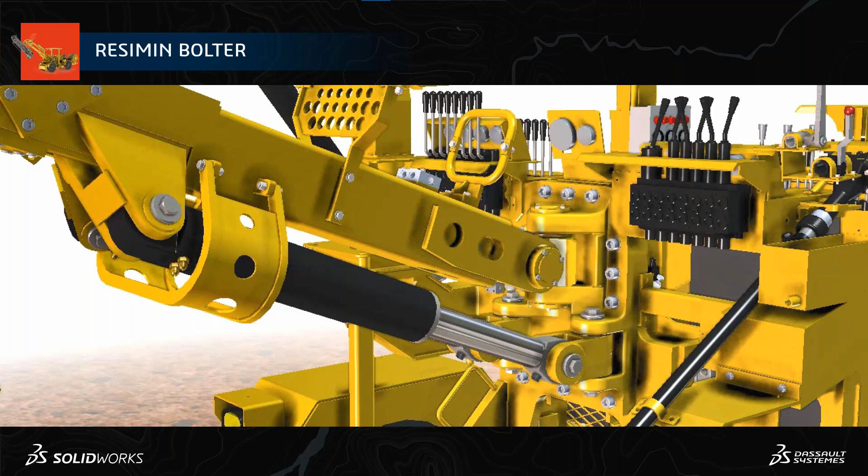In today's webinar, we'll be considering the Resemin Bolter assembly as a case study, a company that manufactures large heavy duty vehicles for mining and other operational activities. Here we'll be trying to design a knuckle component that exactly fits this particular assembly. So now let's start with the solution case studies.

In today's solution case study, we'll be taking different stages of the project launch. First we'll start with the project kickoff, next the mechanical design, next how we'll be validating our designs using the simulation options, next how we can bring this model into marketing and other activities, and finally closing the loop on the final presentation. So let's kick off with the project.

Having an organized approach for managing your project is a key requirement for most companies, maybe managing the existing assets when working on parallel projects, or when we are trying to collaborate across different departments based on the dependencies of the tasks. These are some of the major challenges that are killing more time and exceeding the deadlines of projects. So now let us see how we can manage these things using the 3D Experience platform.

So here we have something called a project planner, which helps you in planning the milestones of your project, where you can have a Gantt chart kind of appearance. That gives you a complete summary of the project.

So as well as you can create a number of tasks, manage your schedules, set up your deadlines, as well as plan your tasks accordingly and share it across the team members, so that you can have a complete overview of the completion of the project, where you're standing with respect to the project and what steps you have to take further to make sure the deadlines are being met at earlier stages. So all these things can be pretty much easily managed with the help of the project planner app.

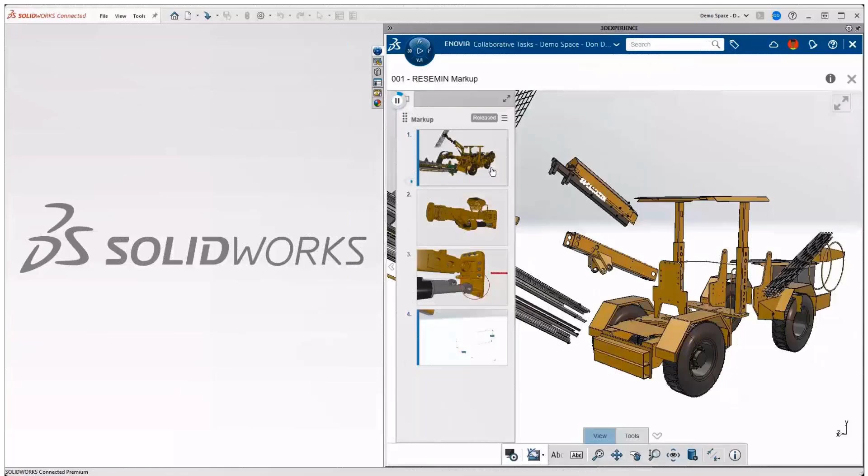So here I have some of the attachments being added from the management level, which are available in the form of slides, and I can completely go through the slides over here and across the visual representation of the model, without even opening the model. So that's how lightweight the 3D experience platform is, and that's how it's gonna hold our hands while managing bigger projects and bigger models. So here, based on the observations added in the slide, I would like to start working on my component. I can also start commenting over here on the task to communicate with the management, indicating that I'm going to start working on the task.

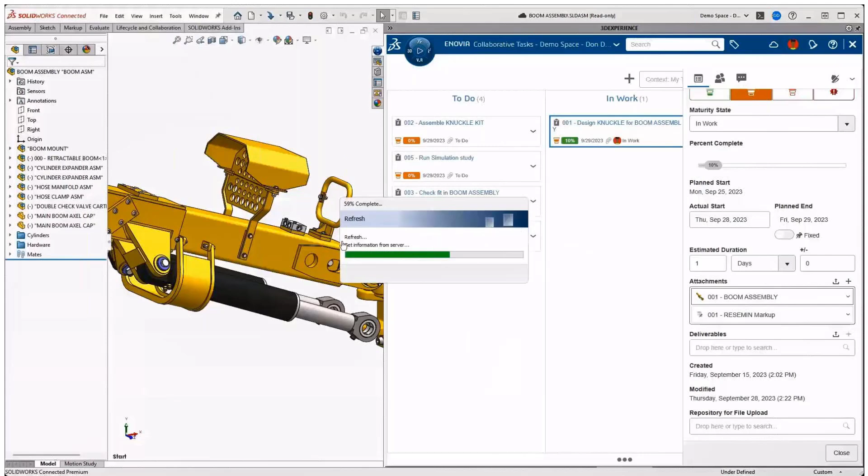And with the help of the attachments added over here, I can directly drag and drop the file that I need to be working on. So the advantage of the task management app is that irrespective of the file size, it can be MBs or GBs, you can readily select the file and add it as an attachment, and the same can be taken by the designer to start working on the further designs.

Whereas if we take up the traditional email process as an example, we'll have multiple restrictions wherein we will not be able to add large size files. So this is an exact replacement that we can consider for an email kind of approach. So now that we have taken up this particular model, let's start working on our further designs.

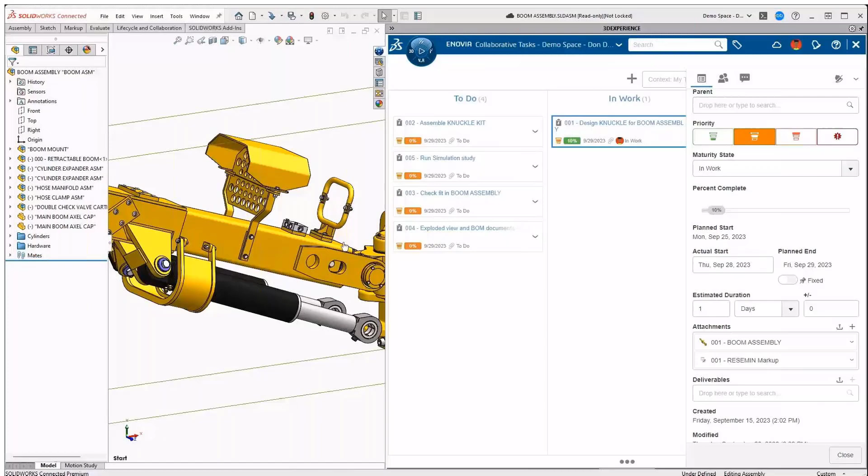So next, I just want to create a knuckle component over here. So I'll be taking up my part template for the designing, and then let's start doing our designs. So initially I'll be creating a simple circular sketch over here, and I'll be defining the dimensions as per my need. So next I'll be converting the sketches from 2D to 3D with a simple dynamic push and pull approach.

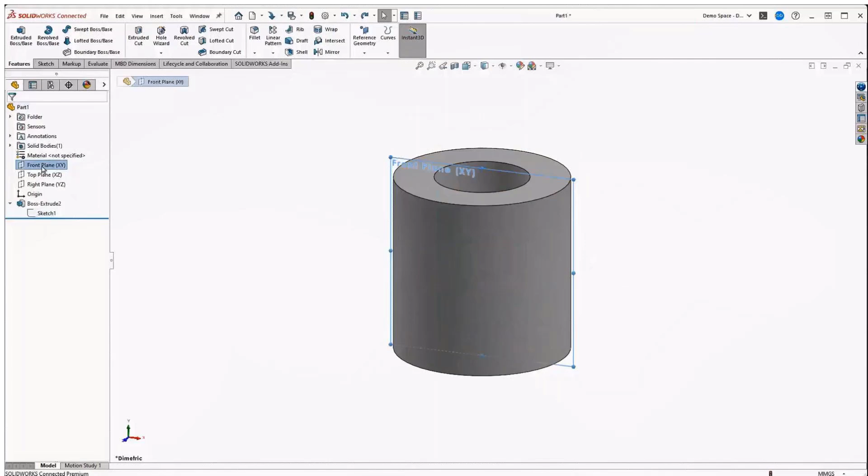And also we can make use of the traditional extrude command, as well as the dynamic push pull approach to create these kind of profiles. So the same profile can also be copy pasted from one plane to another plane, thereby indicating the faster approach. And with the help of these dotted lines, which definitely help me in adding constraints at the drawing level itself rather than adding them separately.

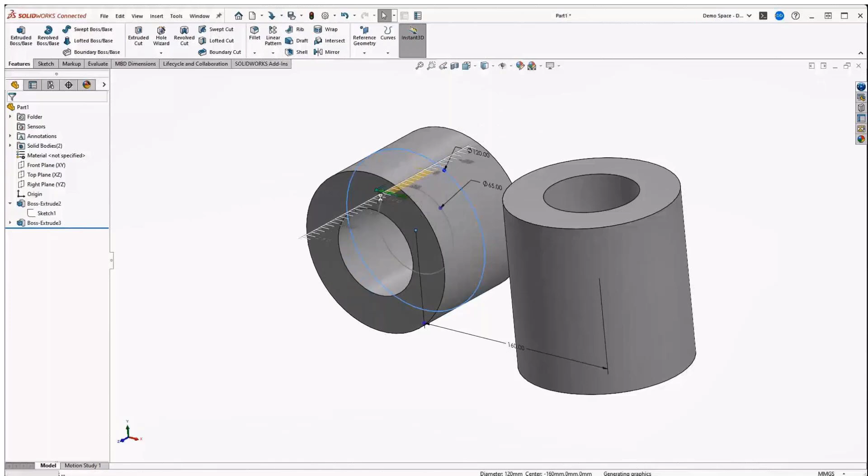So next here I would like to convert this particular 2D profile into 3D as well. And next I'll be adding some referral lines over here. So the construction lines help me in getting uniformity among the sketches. So next I want to snap the edges of this particular rectangle on the edges of the circle, thereby creating dependencies in such a way that at any point of time the diameter gets updated automatically, the rectangle length is also going to be updated.

So other than following the traditional method of mirroring, I can activate the mirror command at the sketching level itself, so that what sketch I draw on one side will also be replicated on the opposite side, thereby completing the 2D profiles. So next I want to constrain these things by adding some dimensions, and next I want this particular dimension to be somewhere close to 90.

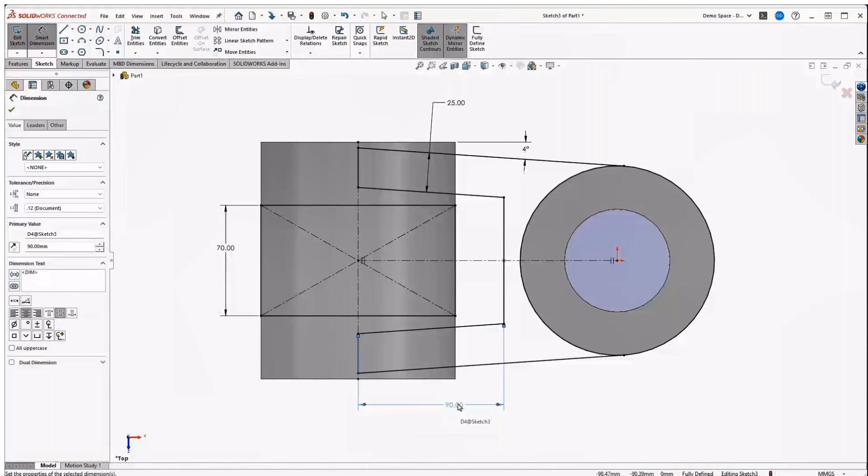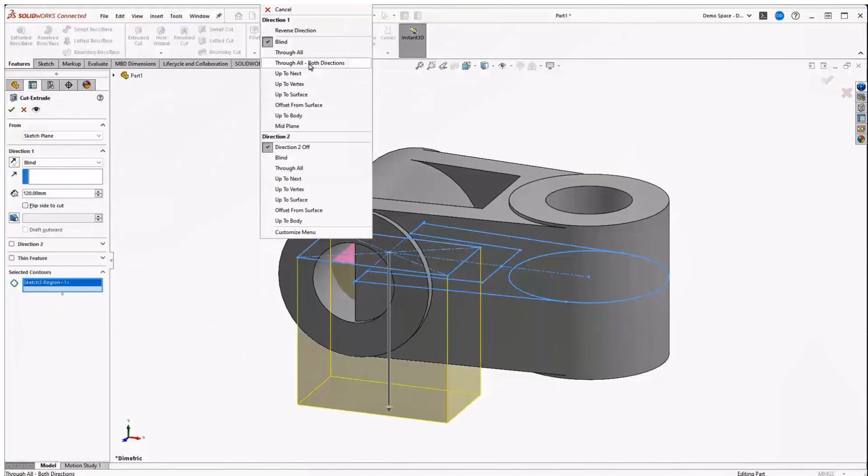So now with the black color indication, SolidWorks indicates that the profile is completely constrained, and it's ready to go for a further approach, that is converting the profile from 2D to 3D. So now I would like to add some material over here using the extrude. And another thing that we can observe over here is that using a single sketch, we have been able to do two operations. One is adding material as well as removal of the material.

So next I have some extra faces over here, which I can definitely delete at a single click and make sure the unwanted faces have been deleted and patched at a single click. So last but not the least, I would like to add some fillet profiles here. So with the help of the smart selection option, I can select similar kinds of edges in a single click, and I can add the fillet profiles for the model.

So now that we have completed this one, we can add some custom properties and also make sure whether it's going to be a buy product or make product, and define its properties over there and save it onto the platform. So now that I have created this component, I would like to save this particular component onto the platform. So before that, I would like to create a drawing for this.

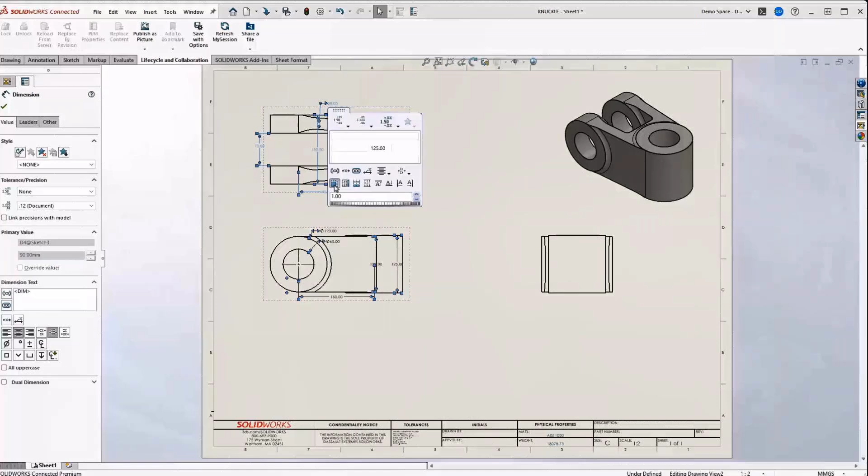SolidWorks provides the right pane, wherein you have all the traditional orthographic views readily available, which we can pick and place onto the drawing sheet and project. We can add different visual styles to every individual view. And next, as we have already defined the dimensions at the modeling level, there is no need for us to redefine them again. We can call back the same dimensions over here and add them.

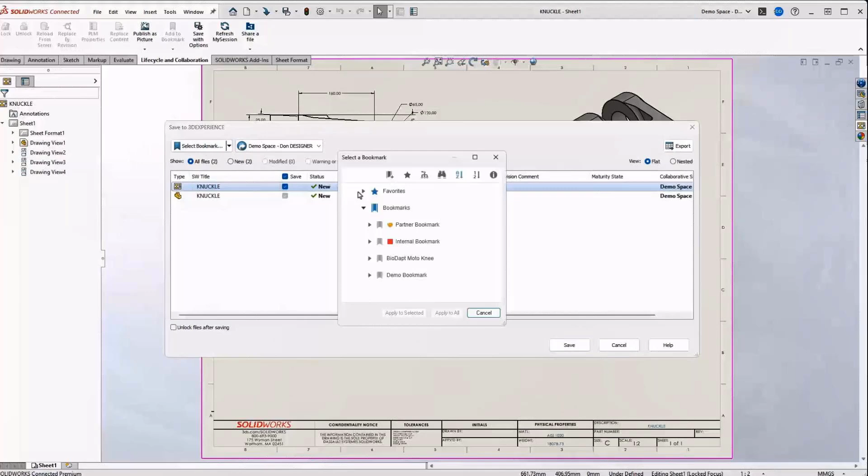So now that I have completed creating this particular drawing, I would like to add some description over here. And once the description is done, I would like to save this back to the platform. So whenever I'm trying to save it, I have something called a bookmark, where I'll be selecting a particular bookmark and saving the model. So what is the use of this particular bookmark?

For example, if we are following the traditional methods of saving, we usually follow internal folder structure methods, wherein we'll be saving the folders at one particular area or address. The same way it can be replicated on the platform as well.

So here we have something called the external sharing option. Most of our customers find a challenge whenever they are sharing their CAD models with their vendors: they don't want them to edit it, or they don't want them to have any access to the internal components of the assembly or anything as such. So in those scenarios,

whenever we have a need to collaborate with our external stakeholders, you can share the file by adding some conditions, that is, restricting the files or restricting the commenting access, and then you can share it with them in the form of a simple link. Your counterparts or vendors can open up the model using the same link, start reviewing the model, and give you feedback on the updates.

So now we just saw in the create and store how we were able to view the collaborative tasks and how we previewed the markup exactly inside the SolidWorks window itself in the task pane, and we created new part components, and also we created drawings and saved it to the exact address or the bookmark location where I actually wanted the model as well as the drawing files to be located.

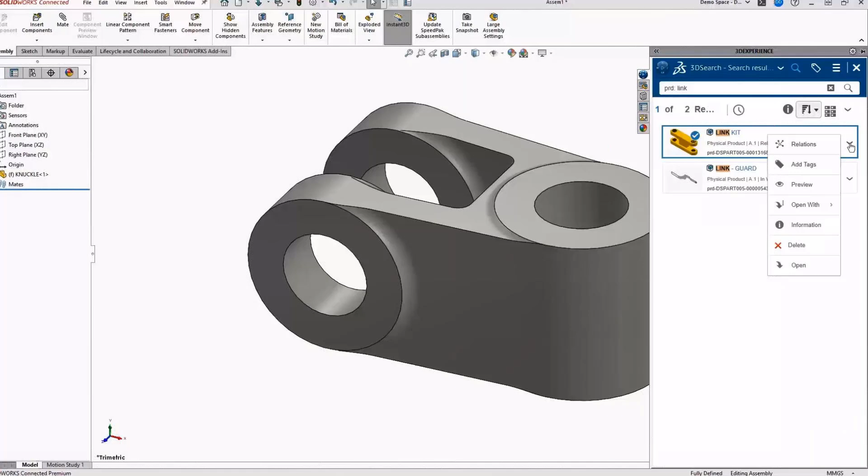So here with the help of the 3DSearch command, I can check for any particular file. I have already used a bearing in one of my existing assemblies. I don't know the name of the bearing, but I remember the name of the assembly. So I can search for the assembly name over here, and with the help of the relationship app, I can find out the parent-child relationship, and what file I need to exactly use in my current assembly can be readily taken up from over there.

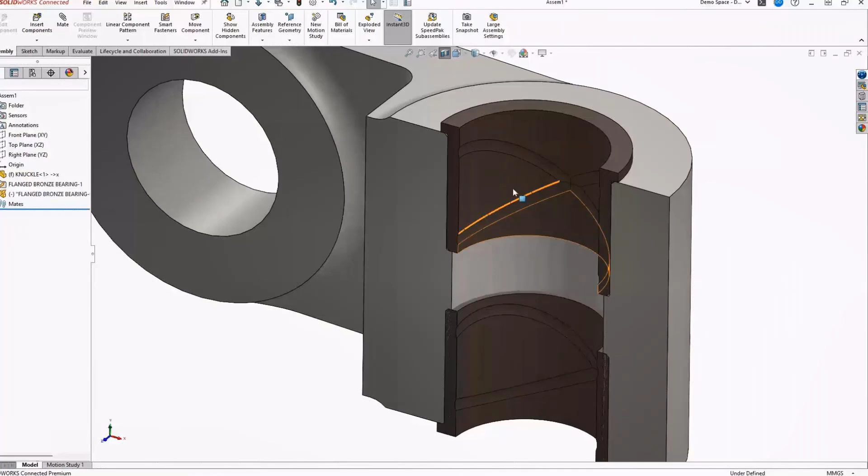So now that I have added this bronze bearing or the flange bearing over here, next I want to transfer some of the properties from the flange to the component. We call it a smart feature, wherein I can transfer the extrude cut option from the flange bearing to the active knuckle component. So whenever you're using any fasteners or at any point of time you want to transfer some of the features from one component to its adjacent mating component, that can be done by using the smart features option. And this transfer of features will also be reflected at the part modeling level.

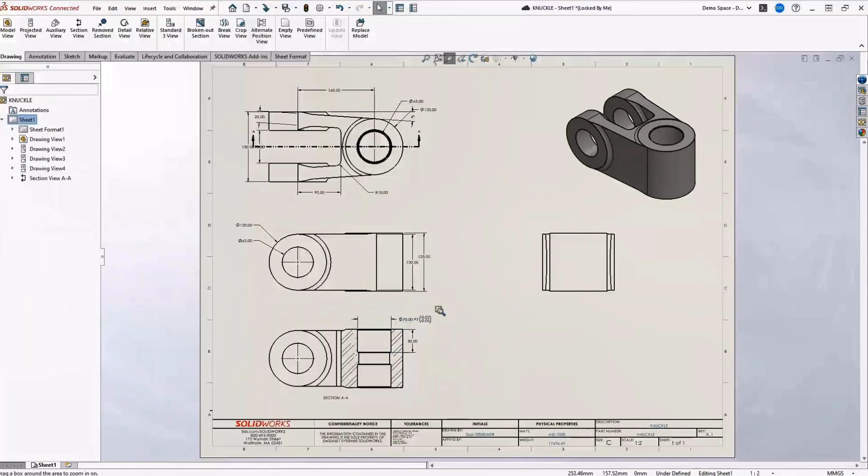So now let us see how it's going to be reflected at the drawing level. We can observe that SolidWorks maintains associativity between the part modeling, assembly, and drawing files. So what changes we have done at the part modeling level or at the assembly level are reflected at the drawing level also. So now I have taken a section view to make sure I add the dimensions of the groove cutting over there. And once these things are done, next I'll be saving the data back to the platform with the latest updates.

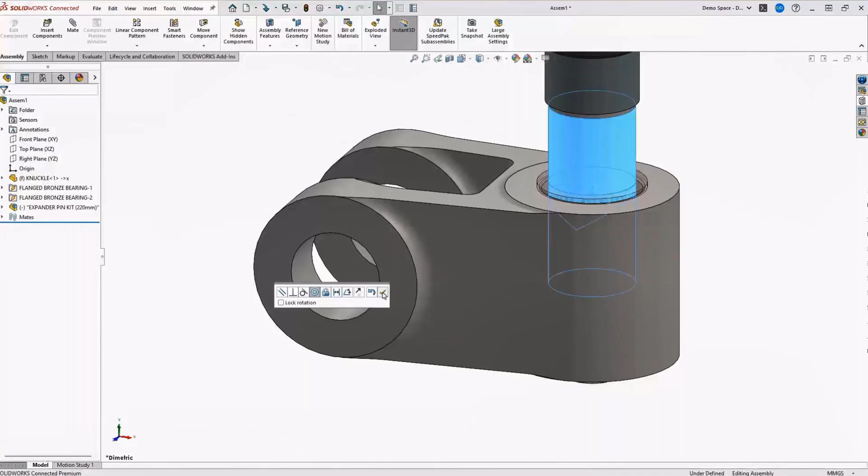So now that we have added this one, I would like to add some more components. I'll just take up an expander pin and I'll try to do an assembly over here. Based on the geometry of the profiles, SolidWorks automatically suggests the possible mates that can be added between the components. Next, I would like to make sure this fits exactly at the center. So I'll be selecting the respective faces and adding an advanced width mate over here. Similarly, I would like to add the same kind of width mate over here.

But SolidWorks also provides us with version control options, wherein I would like to make sure I use another configuration of the same knuckle component over here, knuckle kit. So the same thing can be changed at the time.

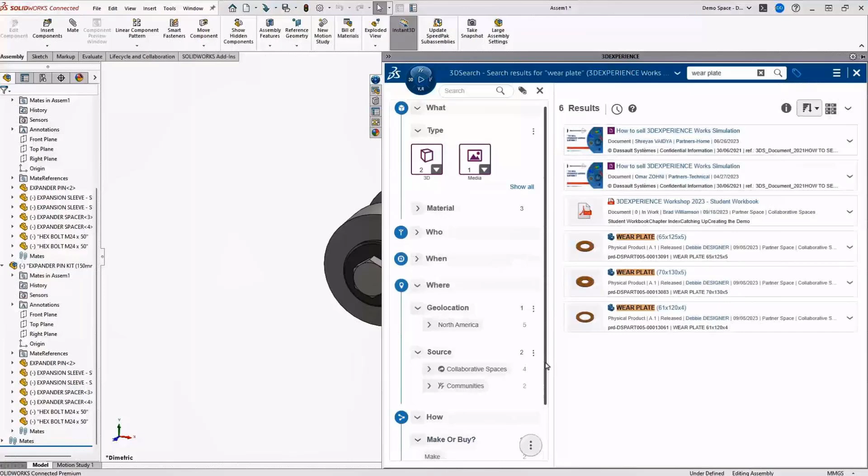So now I would like to add a wear plate. I'll be searching for a wear plate over here in the 3D search. But with the help of 6W tags, you can see I'm getting n number of wear plates over here. By adding more and more filters, automatically the search list gets reduced. So this will be definitely helpful for us as a filtered search option, rather than the linear search option that we have been regularly using in the Windows user interface.

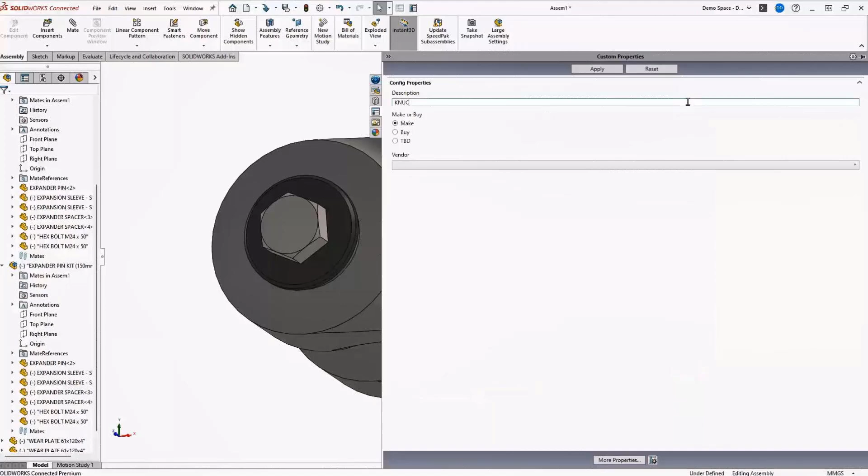So now that I have added this particular component and the assembly is done, I would like to mention some of the custom properties or updates over here. Next, it is going to be saved back to the platform. So here I'm going to name the knuckle kit with the proper title, and I'm going to save it in the same selected bookmark location. Bookmarks are nothing but the address where we are trying to save the files, maybe the models or the drawings.

So now let's have a recap of what we saw in the assemble and reuse session. So here we just tried to make an assembly from the part. We reused the flanged bearing via relations, next we inserted the connected design library components, and we used the 6W tags to filter the source wear plate, and we saved the assembly onto the platform.

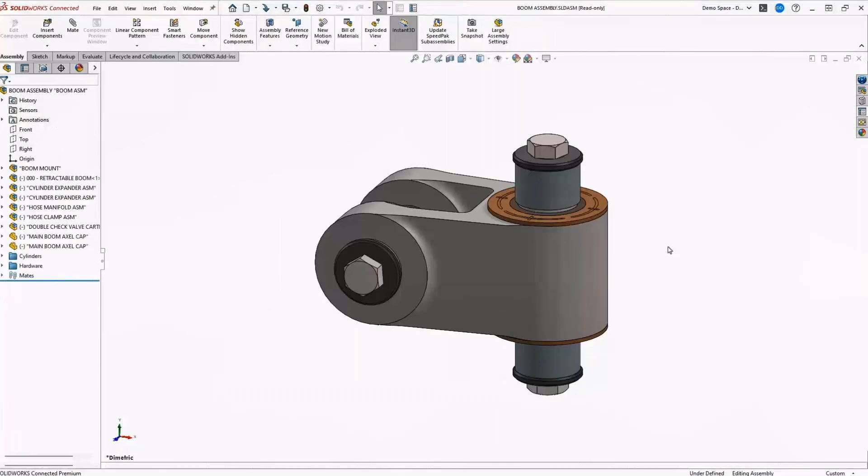So now let's move to the next stage, that is the check and revise part of the designing. In the check and revise part, now that we have completed the assembly, let us see how this particular assembly fits into the main boom assembly. So I opened up the main boom assembly over here. I'll be importing the knuckle kit assembly or the components over here. I want two knuckle kit components to be added for the two boom cylinders available over there.

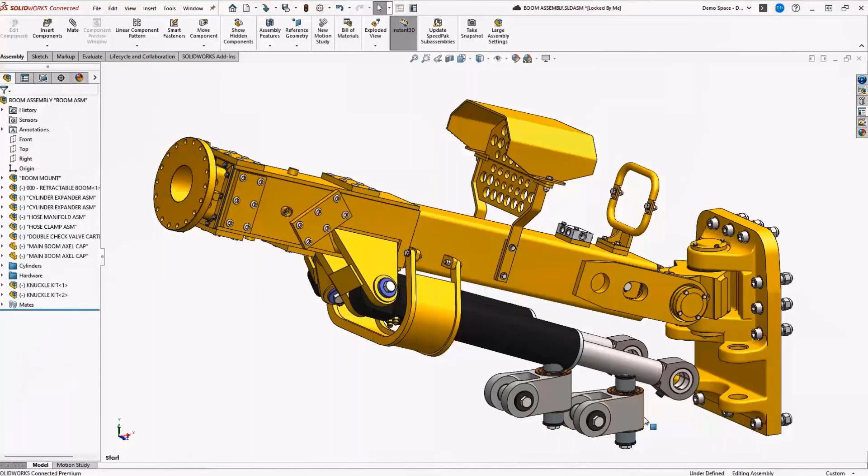So now that I have brought this one, I shall zoom to the area where I want to add those knuckle components and mate it. By clicking on the Alt command, we can activate the smart mates so that we can add multiple mates at a single click. And next I would like to mate it with respect to the boom cylinder. So I shall select these concentric faces and add a concentric mate over there. And the same thing is going to be repeated across the other cylinder as well.

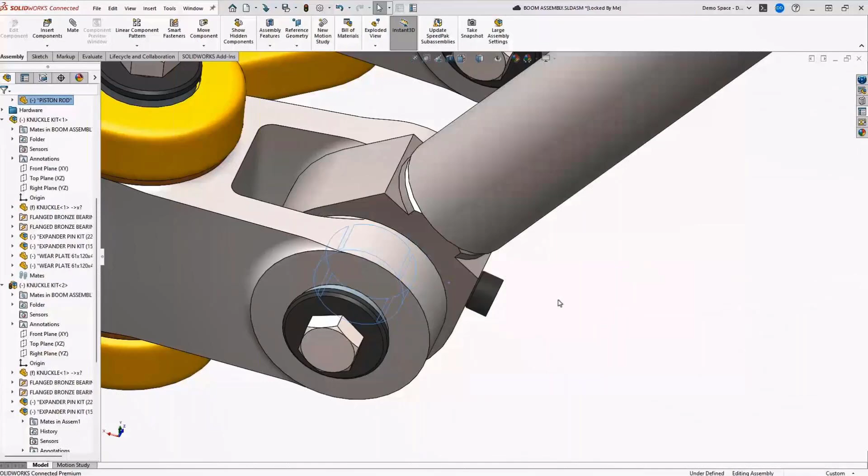So now that we have completed adding this particular boom cylinder, let us validate the movement of the boom cylinder. So here we can observe that the cylinder guard is actually restricting it. Next I would like to make sure the same uniform appearance is going to be added onto the component that I have added. So I can copy paste the appearances directly live on the go.

So now I want to check for interference detection to make sure there is no congestion between the components, and I find there are no interferences in the entire assembly. And next we shall check for collision detection. Even the collision detection options are available in the Evaluate tab of SolidWorks.

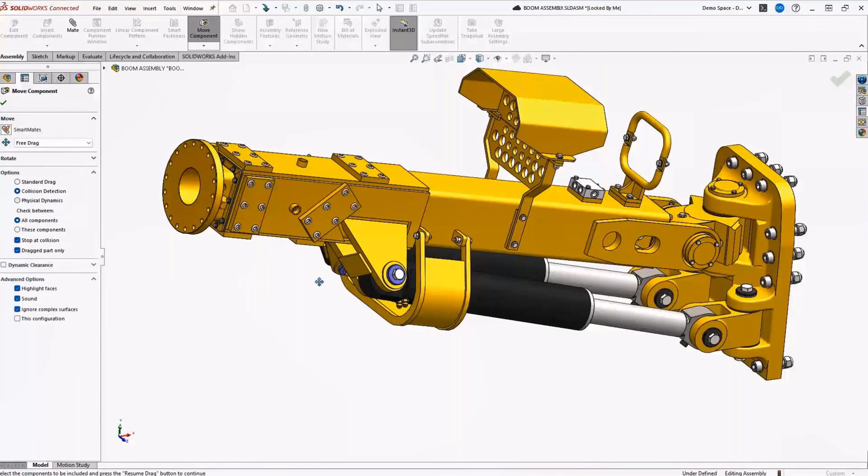So here when I try to move the component, whenever my component is colliding, that definitely gives me an alarm. So here I can observe that the cylinder guard is actually restricting the degrees of freedom or movement of the boom cylinder, which has to be altered or changed over here. So now let us see how we can actually manipulate, change, or maybe redesign the cylinder guard part.

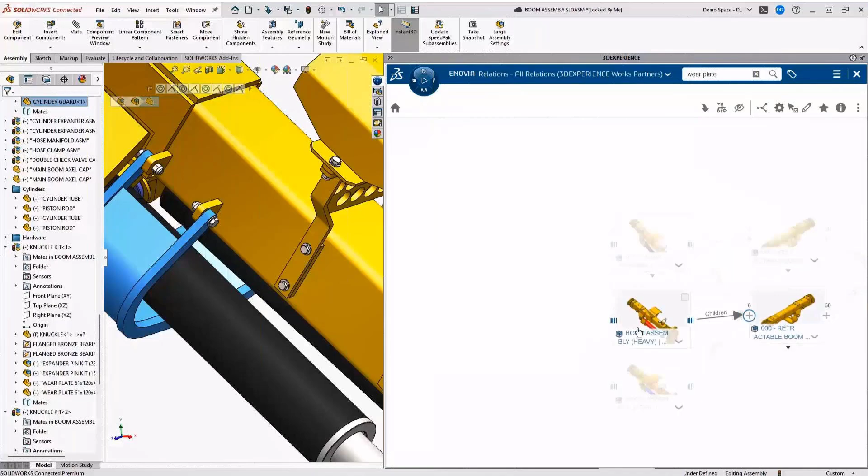So here I'll directly launch the Relations app and check whether the cylinder guard is being reused in any other assemblies. So here I have the cylinder guard component. With the help of the same Relations app, I can find out it's already being used in other assemblies over here. So the challenge for us is that whenever I try to make some changes in the cylinder guard, it's going to be reflected across the other components as well. So what is the best possible approach I can consider over here?

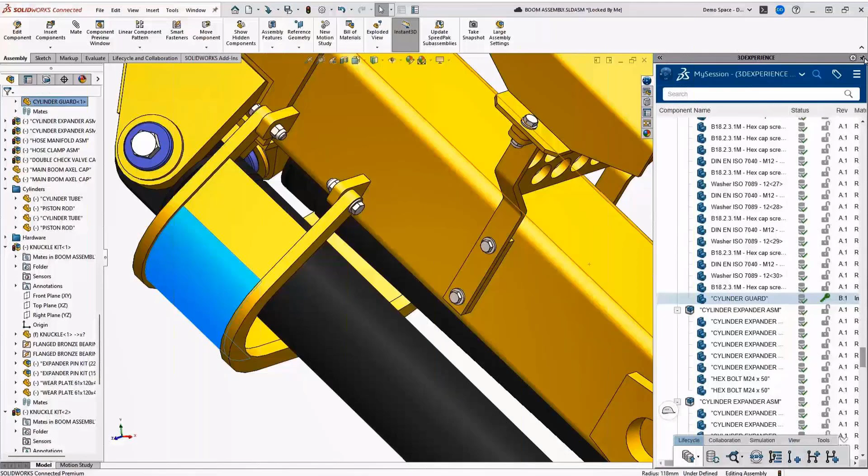The best possible approach that I can consider over here is creating a new revision of the cylinder guard so that the old revision remains undisturbed in all other parent components, and whatever changes or updates we are making in this particular current cylinder guard are going to be updated only with respect to this particular project or assembly.

So after creating a new revision, I'll be adding some dimensional changes over here, and once these dimensional changes have been done, I'll just check for the same collision detection again. So now we can observe that the cylinder guard is not restricting the movement of the boom cylinder. With the help of revision management, we were able to create a new revision, keeping the older parent assembly models undisturbed. So now that we have completed all these models, we shall save the updated assembly components onto the platform.

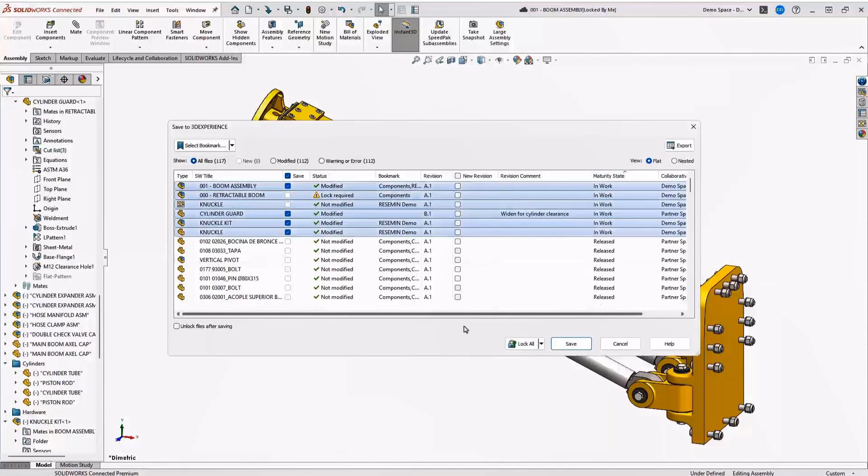So I'll just go for unlock all the locked components and I'm gonna save it onto the platform. So what is the concept behind the locking and unlocking? Most of the times when we are working in groups, if I am trying to create a boom cylinder, there will be another co-worker or colleague of mine who will be trying to design the knuckle component. So at the end of the day, we collaborate and do the assemblies over here.

So whatever components I am trying to create or edit need not be edited by another engineer or co-worker, thereby creating a restriction on duplicacy of work. For that, we have these locking and unlocking options. Whenever I want to work on or edit any component, I'll have to lock that component in my name and start editing on it, and another person will be able to edit the same component only after I unlock the files and push it back to the platform.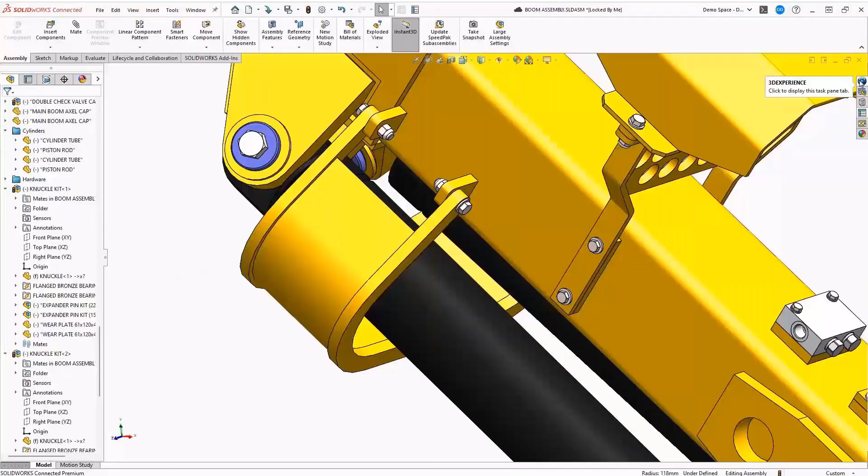So now let's revise what we saw in the check and revise session. We locked the boom assembly and inserted the knuckle kit component. We commented to the teammate about the update of the work, we utilized the relations app for the cylinder guard, and we created a new revision for the cylinder guard, making sure the other parent assemblies are undisturbed, and we saved it back to the platform.

So now let's check on the other stage of the design, that is updating and documentation. Just a moment.

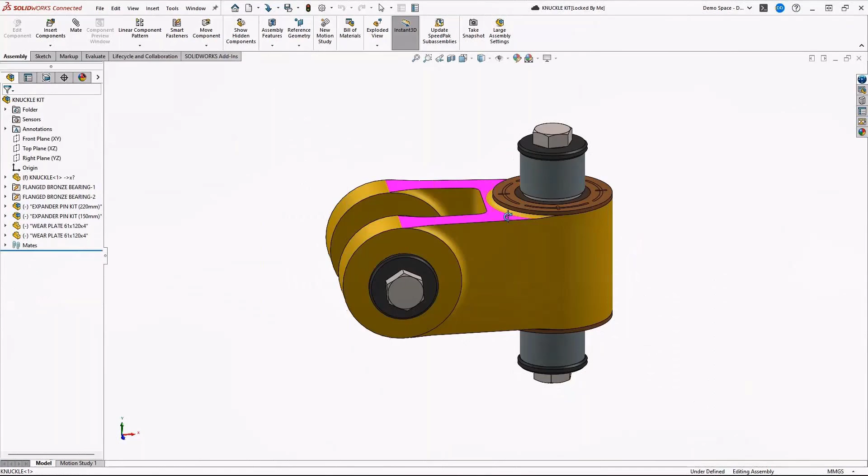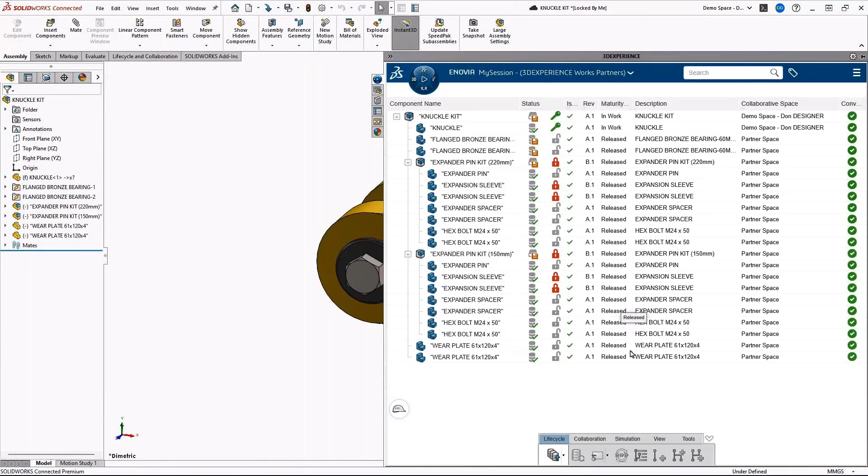So now I want to change the revision over here. You can see the expander pin doesn't have any grooves added. But now I want to update my document with the latest revision, since there are some more revisions of the components. So how do I replace my existing model with the latest revisions? Based on the user's choice, whether they want to use the latest revisions in their assemblies or stick to the older revisions, we can update it over here with a simple click.

So here there are some grooves added to the knuckle component, which is nothing but the latest revision that has been done on that particular expander pin. Now you can see just by clicking on the update to latest revision option, I've been able to make sure the grooves are being added at the component level.

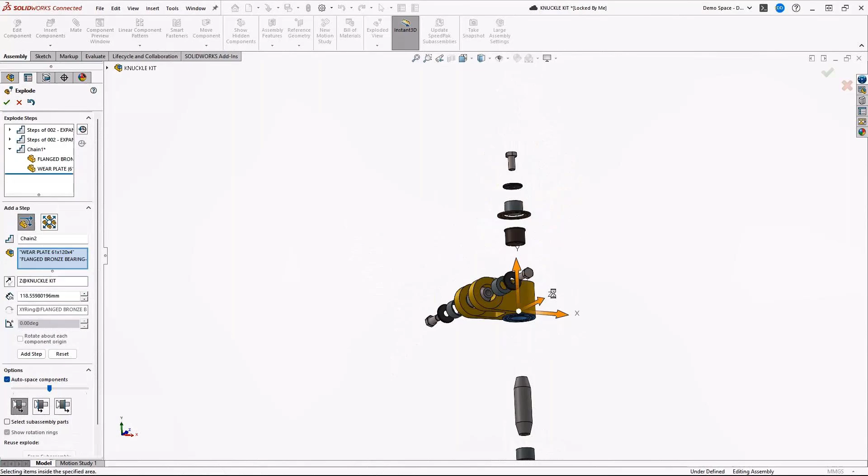So next, we shall create an exploded view of the assembly. Creating exploded views is pretty simple in SolidWorks, with a simple push and pull approach. We can position the components and update it. We can also create an animation of it and export that animated video in MP4 format for further verification or analysis purposes.

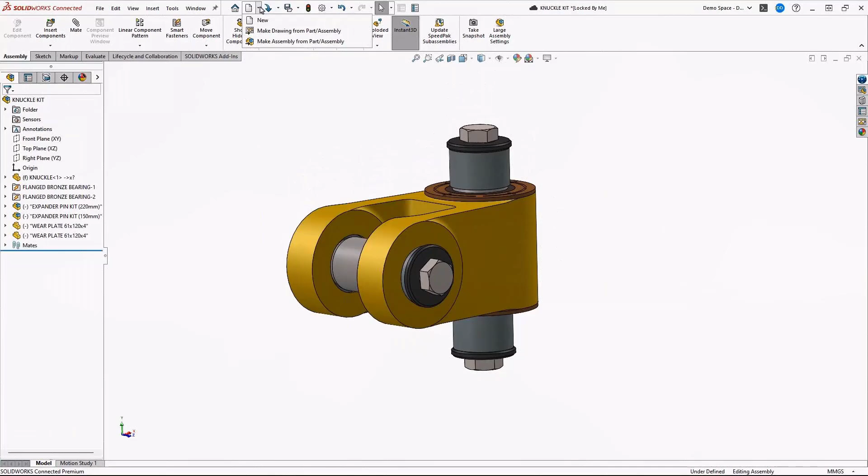So next we shall create a drawing for the assembly of the knuckle component. Here I add the top and front views of the component, and I want to add an isometric view of the exploded view of the model. I can also arrange or change the view orientations and the visual styles.

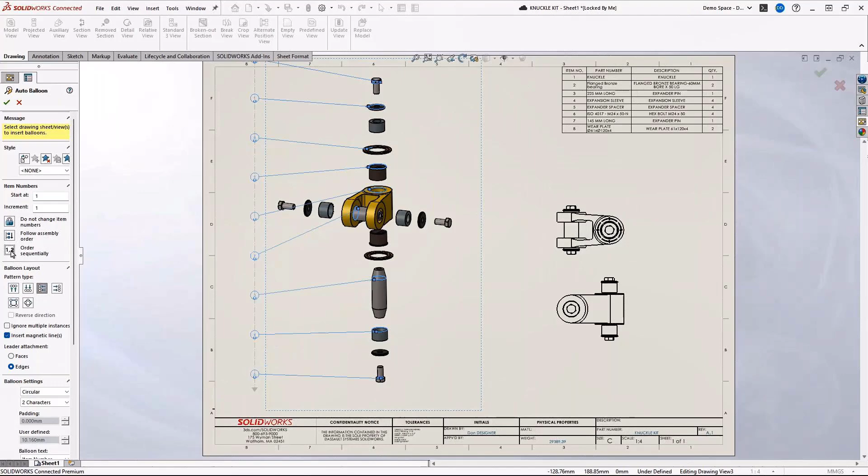So next I want to add a bill of materials. A bill of materials can be added at assembly level, individual part level, and sub-assembly level based on the user's need. After adding the bill of materials, I want to add some auto ballooning, which defines the balloon IDs. The placement of balloons also has a wide variety of choices, where you can place it across and around the components.

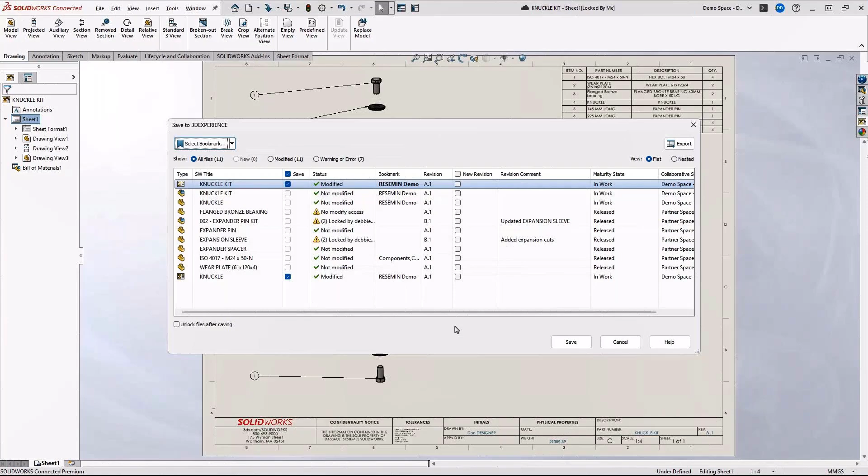So now that we have created the final knuckle kit assembly as well as the drawing of the knuckle kit assembly, next we shall save all these updated documents onto our platform, at the right bookmark location, indicating the components are addressed at the specific area. Now I'm going to add the latest deliverables. Initially, we had the boom assembly added as an attachment. Now I am adding deliverables, that is the drawing.

So whatever work I have completed, I'll add the deliverables to the task and move the state of the task from in work to completed. Thereby the person who assigned me the task gets to know that I have completed it, and he can directly open that task and check the deliverables for further verification, changes, or anything that has to be updated in the further process.

So now let's see what we saw in the update and the documentation session part. So just by the simple check-in and check-out by the user, we were able to take up the models and update it. So we created some exploded views, and we also created some assembly drawings, and finally added the automatic balloons and BOM and saved it back to the RESEMIN bookmark.

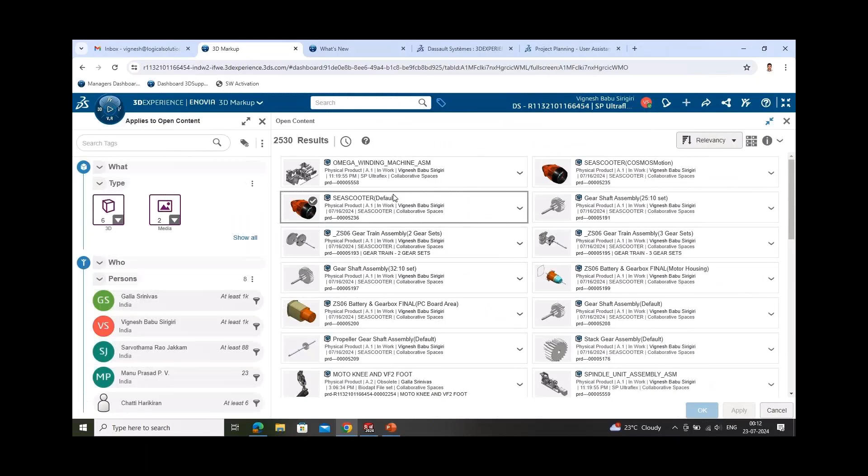So the next part of the process comes with the issue management. So most of the times, once we have completed all our designs, or the scenarios where the designs have been released and it goes to the manufacturer, the manufacturer might feel like if some minute changes are being done in the designs, he can manufacture the component in-house and there will be a reduction in the procurement; the list of the components that has to be procured from external will be reduced.

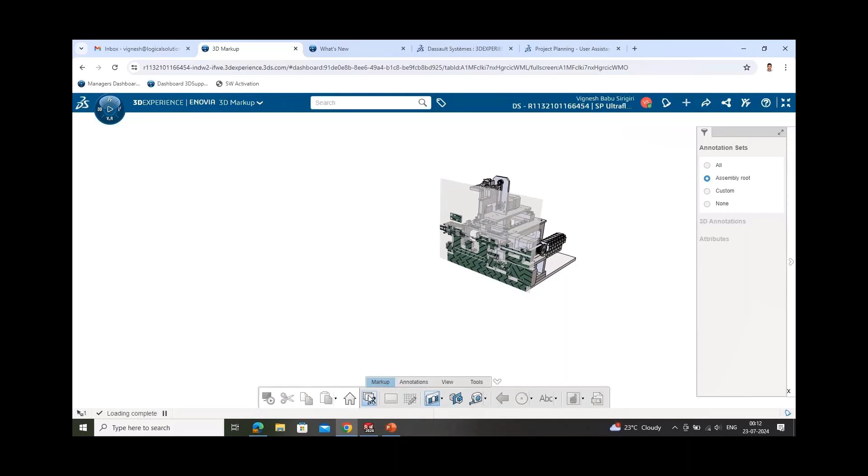So in those scenarios, the manufacturers can raise an issue by using the issue management app. So just like how we added the markups earlier, similarly we can add some markups over here for creating issues. So here I have a simple example, where the manufacturer is trying to add some markups for the slide and he's going to create an issue for the particular slide.

So he can take snapshots of it and add it onto the slides, and he can add some symbols over there, or maybe add some markups for the areas where the design changes or updations has to be done. So with the help of the text, we can also add some comments over there. So here, what I would like to do is I want to increase the number of counts of that particular transmitter. So I'll be attaching it to the circle that has been marked up over there.

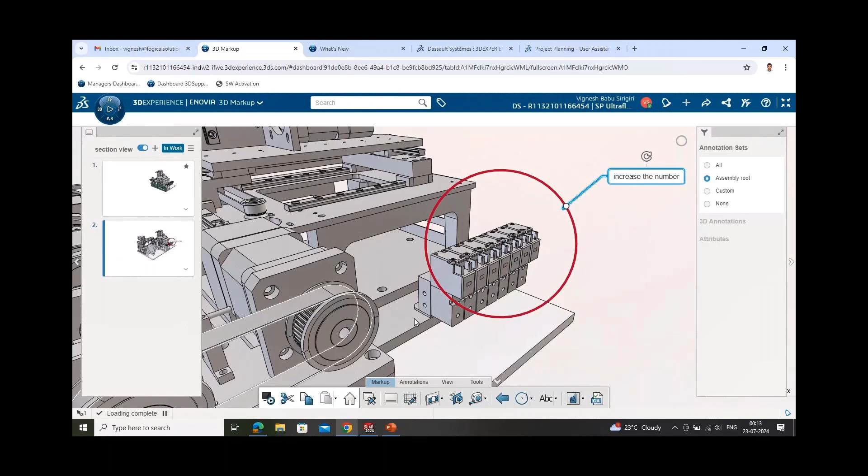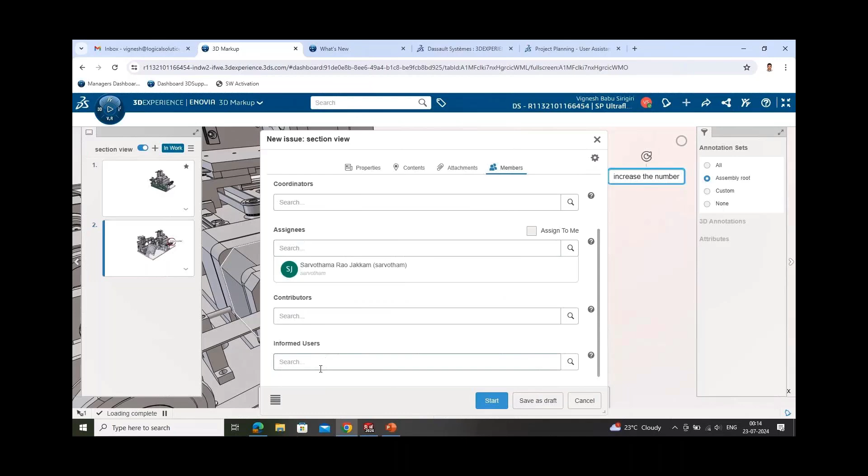So next, once this particular part is done, I would like to create it in the form of an issue and launch it onto the community page, or maybe assign it to another engineer to work on. So here I'm creating a new issue in the markup environment itself, so that the project manager or the main designer is going to understand what are the changes that has to be done over here.

So now that the issue has been created, let us see how we can address those issues. So here we have a scenario where multiple issues have been raised from the manufacturing team or the counterpart. So next, what we would like to do is add some of the change actions over here. We can also add the components based upon which the issues has to be managed, or the things has to be updated. So here we'll be moving the maturity state of the issues from to do to in work, indicating that we have already started working on the issue.

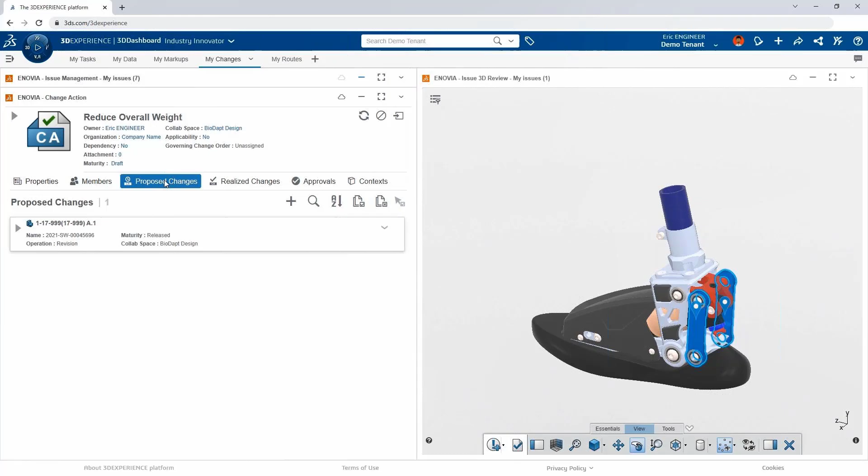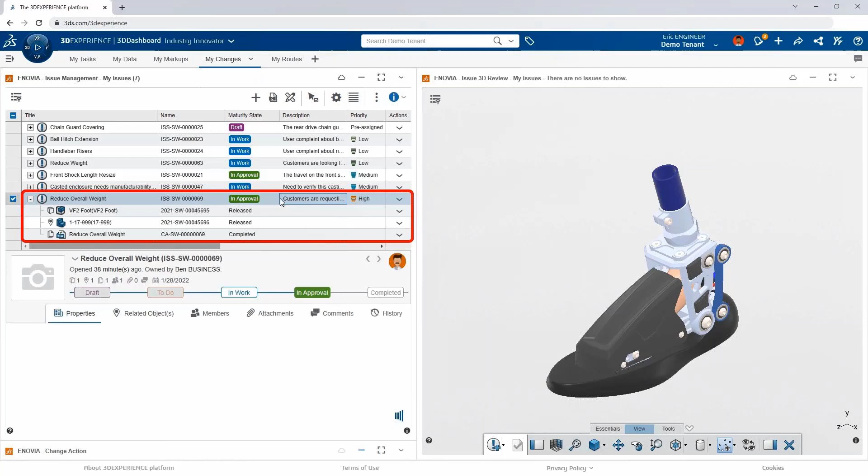And once the component is being completed or updated, next what we shall do is we can move the maturity state of the change action to be completed. So thereby completing the change action, we have been able to complete the issue as well, addressing all the necessary changes to be done.

So that's how you can make use of the issue management app to collaborate between your manufacturing team, or maybe collaborate between the cross departments in your organization, and also have a uniform record of the changes being done with respect to the product from its scratch, that is at the designing level, to the final release level, and also having updates on what changes have been done and what are the steps taken to address those particular issues.

So now what we saw in the issue management is that we just created issues and markups. We shared issues on the community. And next we planned the change actions to address those particular issues, and finally completed the change action, thereby completing the issue as well.

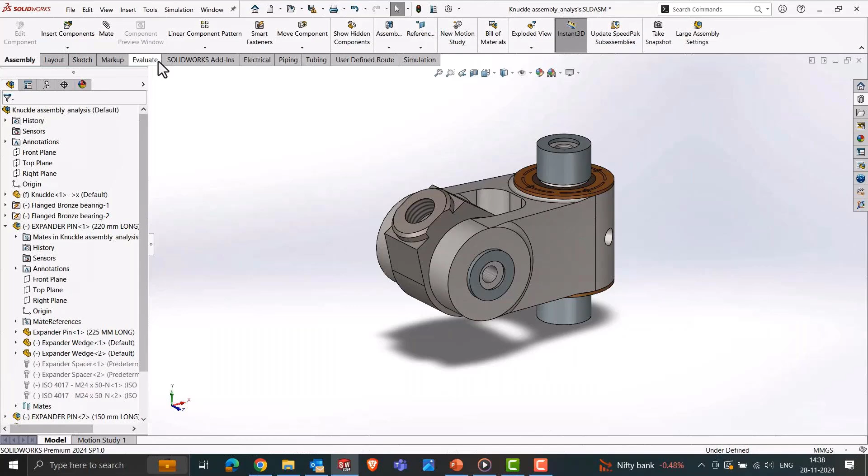So the next part of the design cycle is the simulation part, or the design validation. So here I have the same knuckle component, and here I would like to make some design validation or run some simulation on this particular component. So before that, I want to hide all the toolbox components, which I'll be hiding by using the selection option.

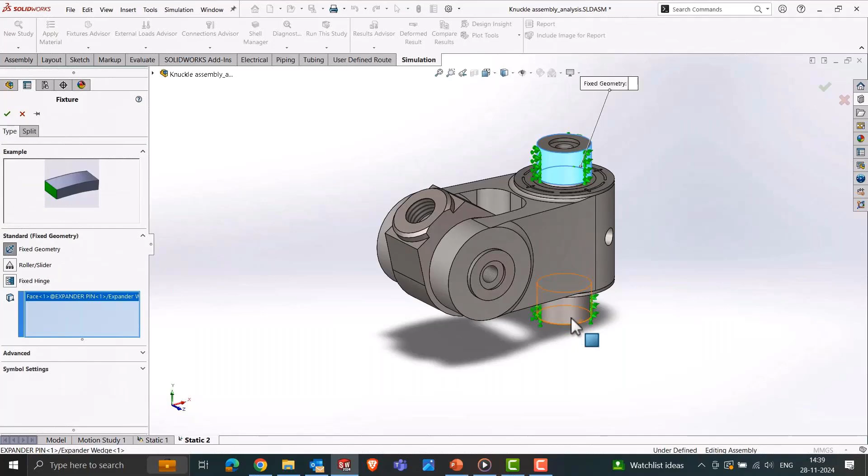And next, I'll be activating the add-ins in the SOLIDWORKS environment, and I'll be running a new study for the simulation. So first and foremost, I need to define the geometry. So here I'll be considering these cylinder faces as my fixed geometry, and the wear plate is going to be a slider geometry. So here I'm going to add a sliding mechanism on the wear plates over here.

So once the boundary conditions for the simulation are defined, the next thing is we shall add some loads on it. So here the load is going to be acting on that particular face, so I'll be selecting the face upon which the load is going to act, and define the quantity of load that's going to be added over here. And once all the boundary conditions have been defined, next we shall run a simple simulation study.

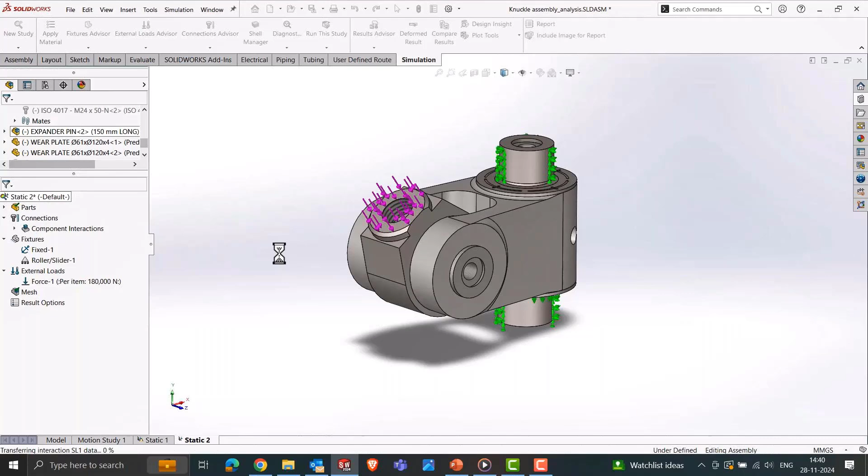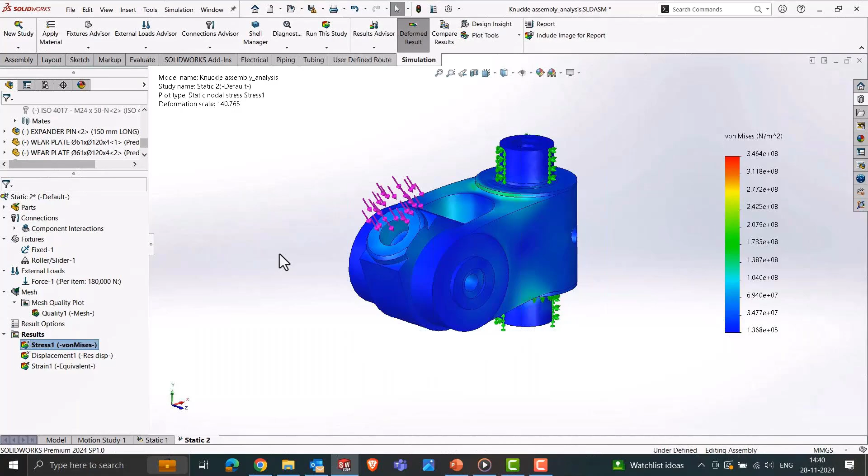So the simulation takes a tetrahedral meshing approach, where it completely breaks down the component into single individual components, and then runs the pressure or the boundary conditions on every individual component as well as the assembly level. And once the simulation is run, it also solves the component and gives us a visual representation of the report. So here we can also check for stress analysis, where you can see the scale over there, and the displacement or the strain analysis.

And next I would also like to check for factor of safety. So here I'll be adding another factor of safety option over here, and here you can see this defines the breakage point or the design area where I have to rework my model. So here we can observe that we have some red color indication that the factor of safety is not met at the corner fillet levels. So now I need to make sure these particular corners have been readdressed.

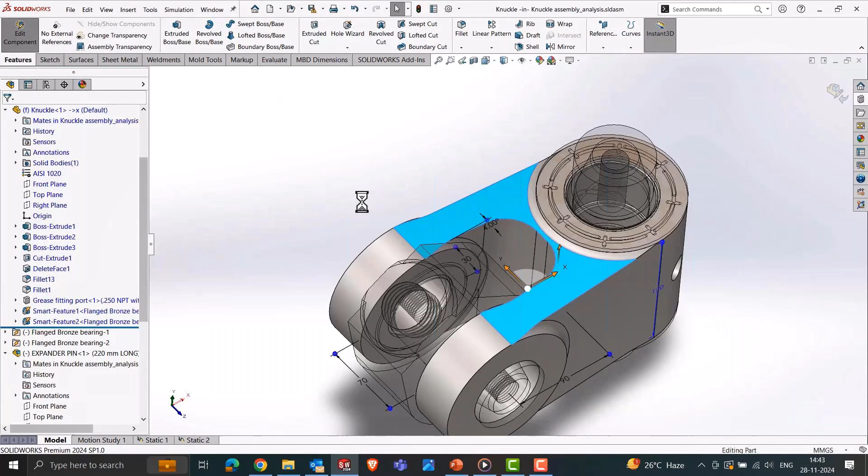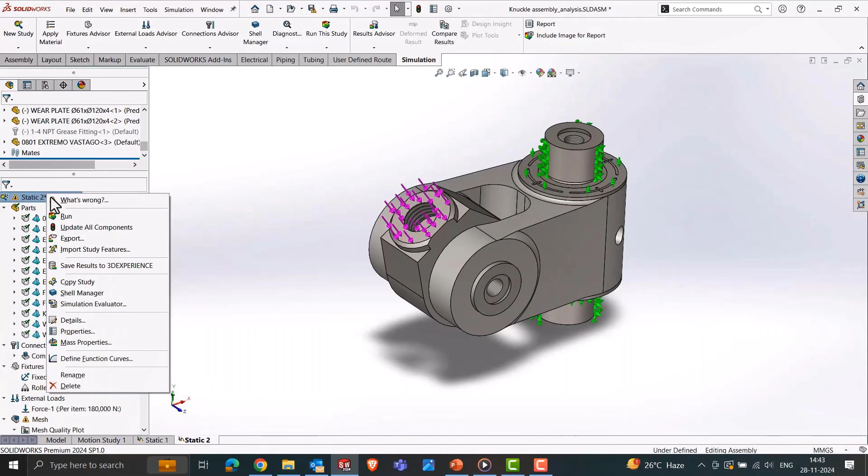So I'll just make the changes over here in the assembly environment itself by entering into the part editing mode. And next I'll be defining the radius of the fillet over there. So once the design changes have been updated, the next thing is I would like to run the same simulation study. There is no requirement for me to define all the boundary conditions from scratch again. Whatever boundary conditions I had defined at my initial stage can be rerun on the updated model.

So now we can observe that once I go for the factor of safety, all those areas where the design changes or the rework had to be done are now completely safe. We can see most of the areas are in blue, indicating the safety of the design, and the areas where we had the red color indication for factor of safety threats have been completely eliminated now.

So in the design validation part, we just checked on the stress analysis, strain analysis, the factor of safety, and next part is going to the market. So now that we have done our designing as well as worked on the simulation part, the next thing is how do we get this product to the market? How do we make sure people get to know about it, and how can we actually present this product to our customers or the entire world?

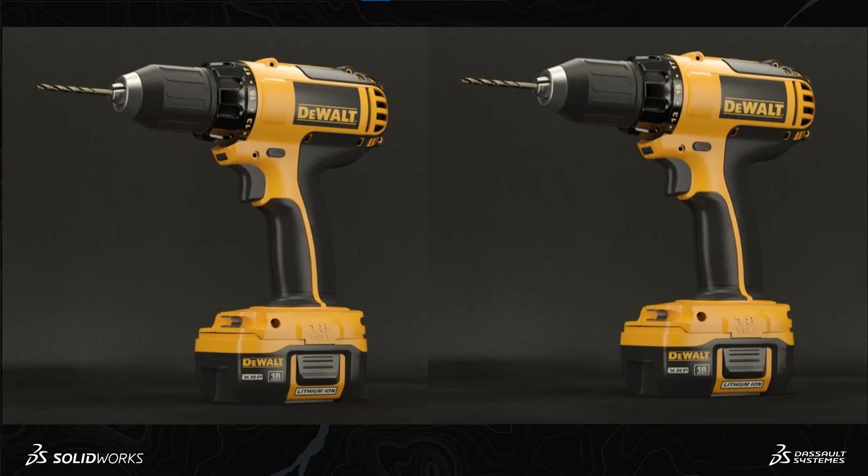So first we'll be starting with the real-time render tools that help us in creating photorealistic images for the CAD models that we have created. So here I have a simple example or scenario, wherein I have two images. One image is a DSLR captured image and the other is a CAD rendered image. So let us see which one is actually the CAD rendered image. You can see the left one is a CAD rendered image and the right one is a DSLR captured image. So that's how close we can expect the outputs of Visualize with respect to reality.

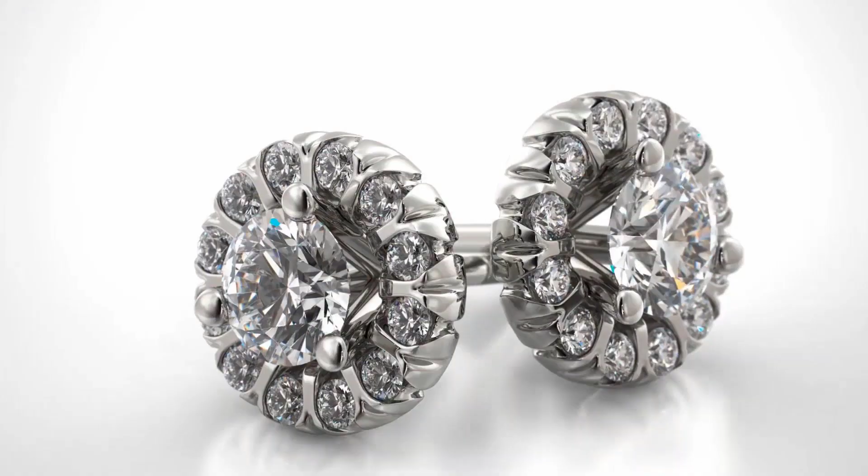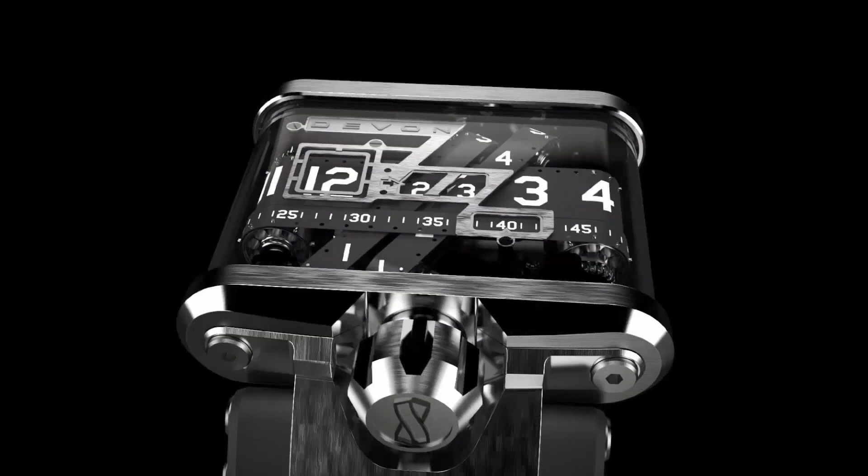So here I have a simple small video clip that defines the outputs that we can expect from Visualize. It can be from a simple lighting effect to an interior, or maybe the animation or the motion study. All these things can definitely be done in Visualize. Here we can observe that even environmental animation can also be done. So this is just a quick glimpse of the capabilities of the Visualize tool. Isn't that impressive?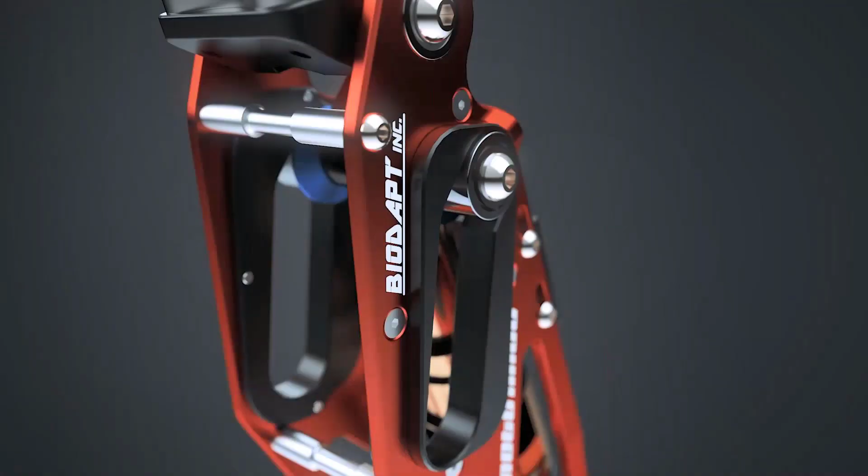So here I have a simple animation done for the assembly, which defines how the assembly is done, using the Visualize tool. These are the kinds of animations that help us impress our clients whenever we are trying to present our completed models, or for creating your marketing content, or to publish these videos on your websites or your presentations. So now we just saw how we can create realistic renders using the Visualize tool.

So whenever you need to create a user manual for your component, how do we create those user manuals? We definitely have a tool that helps you there, that is SOLIDWORKS Composer. I would like to take you through a live presentation of Composer, so I'll just go to the app over here. So here I have the Resemin boom assembly that I have taken.

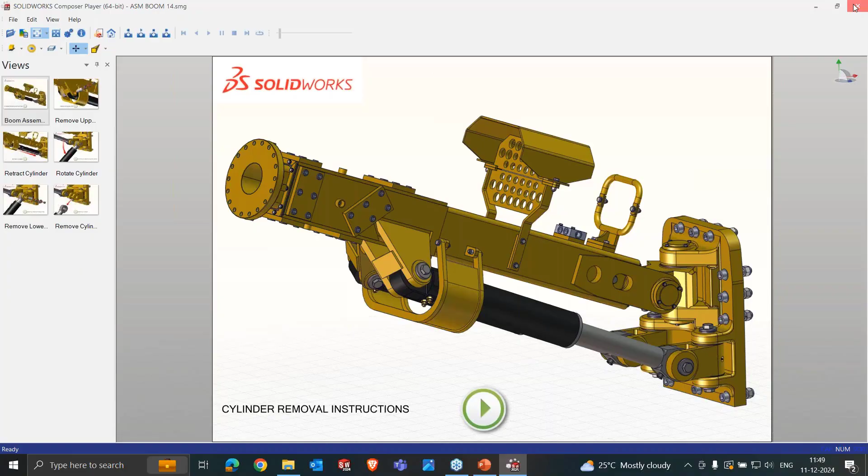So here you can observe I have created multiple views, which indicate the operational setup for the components. Just by getting into these views, I have been able to move the component. Similarly, I can check on the animations as well. So whenever you want to create user manuals, that can definitely be achieved by using Composer.

So maybe some technical illustrations, or when you want to create instructions on how to do assembly of the component, or how to do disassembly of the component, or maintenance manuals, user manuals, all these things can be done in Composer. So here I have the main Resemin boom assembly. Here I have to replace some of the components. So how do I replace the components?

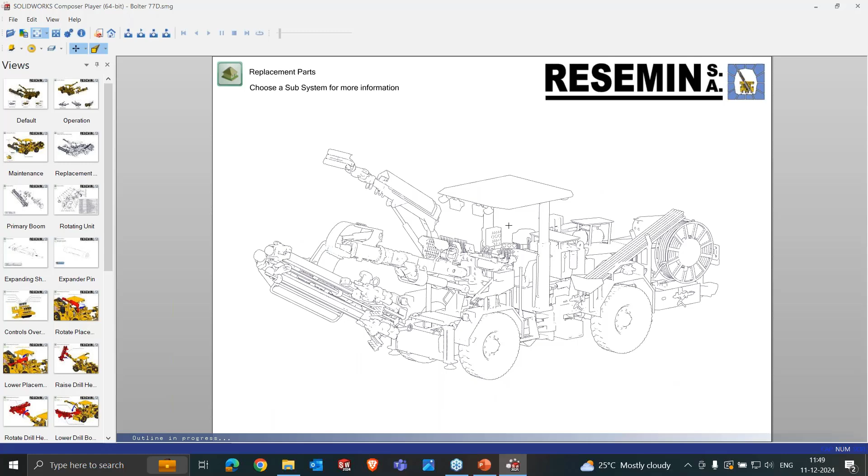I can directly select the view over here, and I can switch between different views by creating interactions. Here I want to check on the maintenance part. I have another view added, so I'll directly click on the maintenance view, which gives me a clear idea about the maintenance of the components. Next I go back to my home view, and here I want to see the operational features, so I can directly select the operational features. Just by clicking on the buttons over here, I can make the component move.

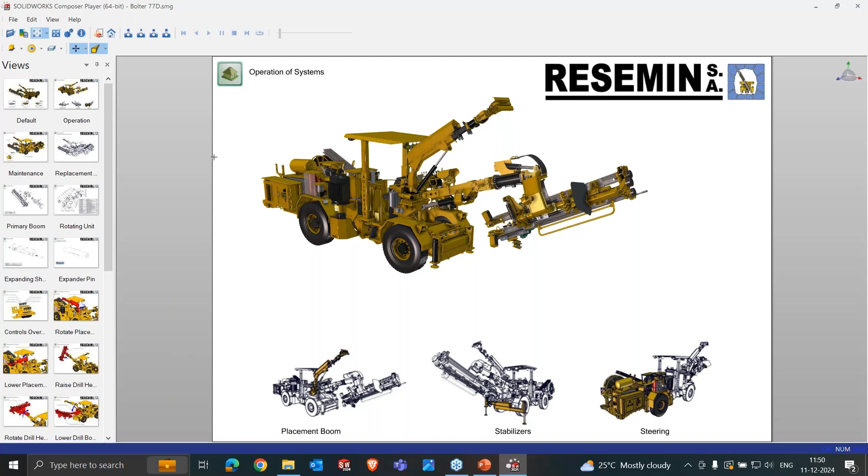So these are the kinds of interactive contents that you can create to your own CAD models and use it for further elaboration or illustration of the part components. So other than creating these kinds of views, or maybe the bill of material parts, so here I have created this particular component with a silhouette representation.

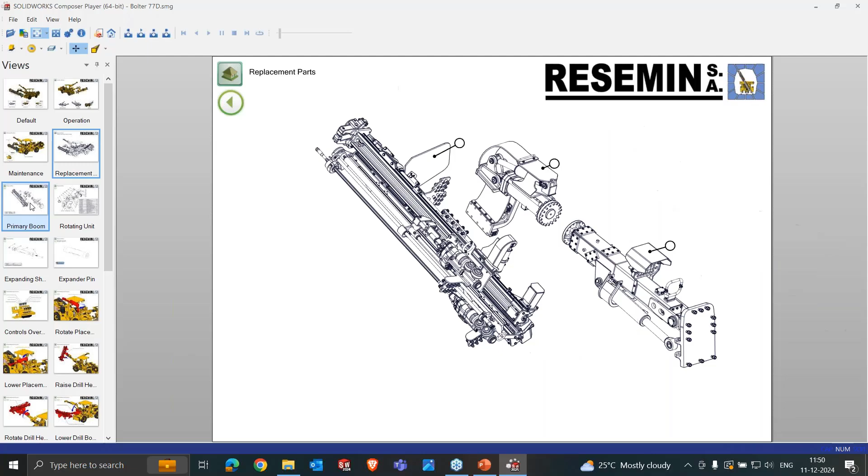So next I want to define or give more details on the internal parts over here. So you can create n number of views over here, and also next here I have created a bill of materials. So whenever I hover my cursor over the bill of materials, the component gets highlighted. So that's how you can create bill of materials and also know more about the usage of the components. So you can create n number of bill of materials, and everything can be done over here. So this is one portion of the composer.

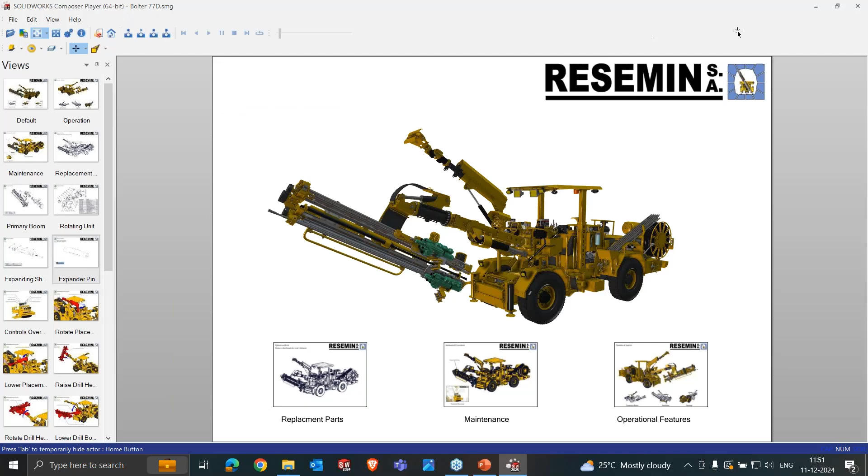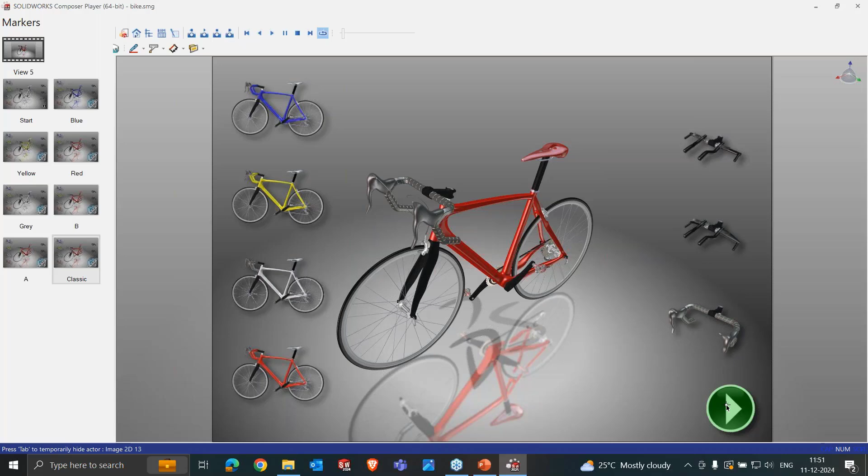So these kinds of options that you can give to your customers by publishing the contents on the websites, so that you get to know what are the customer demands and needs that they are actually expecting from your company as an output, so that you guys can stand parallel along with the changing trends and get to know more about the customer needs and requirements. So other than that, we can also create animations over here which defines the usage or maybe the maintenance of the components. So these are the outputs that we can expect from the composer.

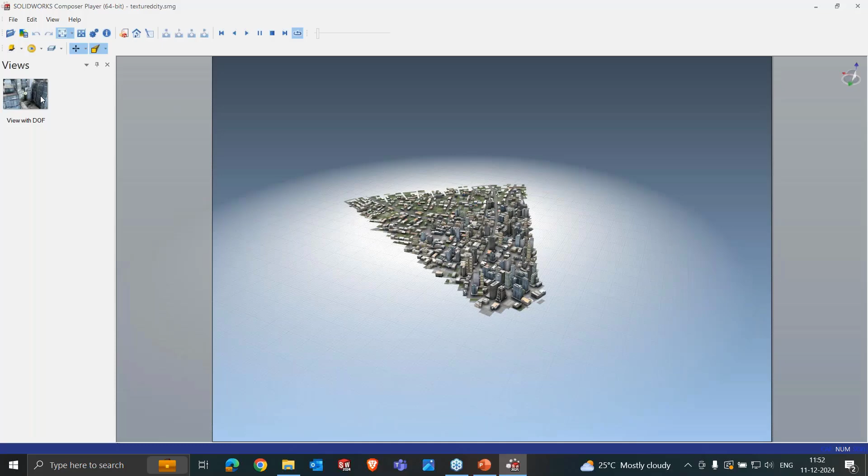So other than this, last but not the least, if you would like to create a walkthrough animation, if you're working on some larger assemblies or interior factory kind of a setup, you can definitely expect the best output from the composer in terms of walkthrough animations as well. So here I have a simple example of a textured city that gives you a clear idea about the walkthrough or the fly through animation. So this is a CAD model that I have taken, and here I'm trying to create a walkthrough animation using the composer tool.

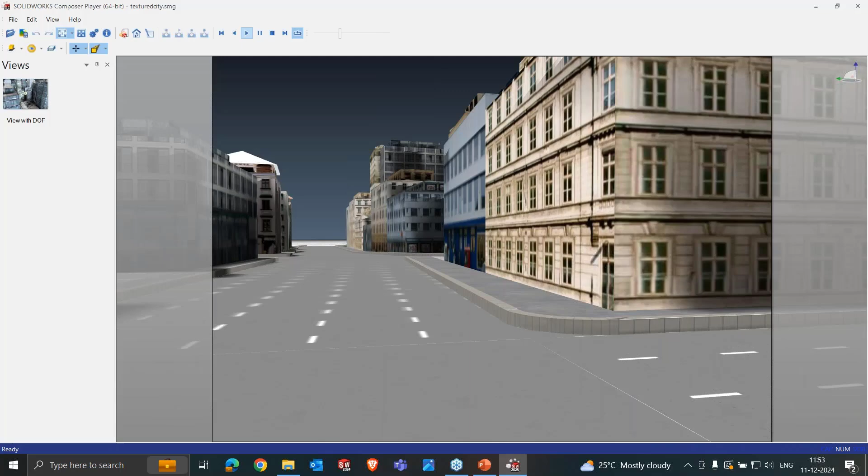So whenever the camera walks on the streets, we call it as a walkthrough animation. Whenever we make sure the camera flies above the ground level, we call it as a fly through animation. So based on the designer's need, we can create either a walkthrough type of animation or the fly through kind of an animation. So now let's get back to the PPT.

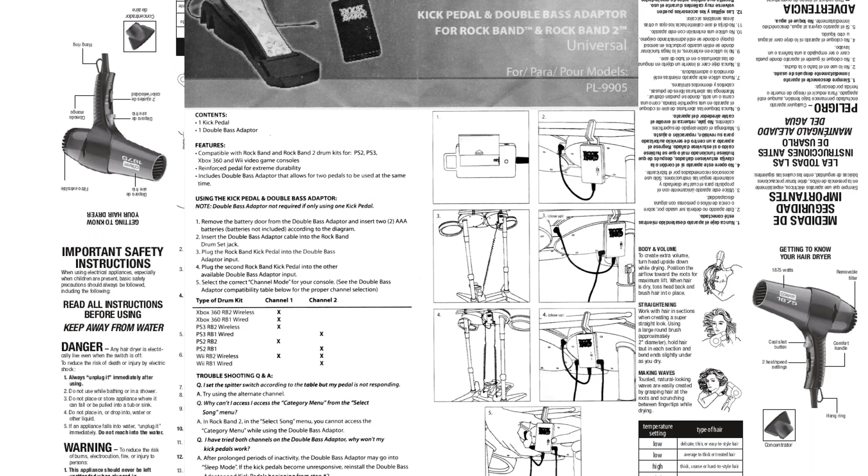So these kinds of user manuals can also be created on the Composer tool. So you might have come across these manuals whenever you purchase any gadgets online, maybe on Amazon or Flipkart. So these are the maintenance manuals. We call it as self-explanatory manual, wherein just by looking into the pictures and the text being added over there, we get to know how to use that particular gadget or the device, and we can start working on it. So these kinds of manuals can also be created along with advanced animation outputs.

So here we just saw using the technical documentation, how we can create the interactive document, technical illustrations, and accelerate time to product market using the visualize as well as the composer tool. So closing the loop, looking at the industry trends or challenges we saw earlier, how these challenges are going to be addressed on 3D experience platform. So to meet all your deadlines with precision, by the adoption of project planner app, this particular challenge is going to be completely eliminated.

So to get the cutting edge design and state of the art, we have SolidWorks along with the browser based designer tools that helps you in achieving the final designs. You can transform your ideas into reality with remarkable speed with the help of share and markup options available on the platform. You also can exhibit exceptional design agility and ability with the help of the change actions as well as the issue management and the collaborative lifecycle app options that is available on the platform. So we just saw how the manufacturing team was able to give updates to the design team to make sure the issues have been resolved.

So last but not the least, all the outstanding deliverables as well as the return on investment can definitely be achieved by the adoption of the 3D experience platform into your design cycles.